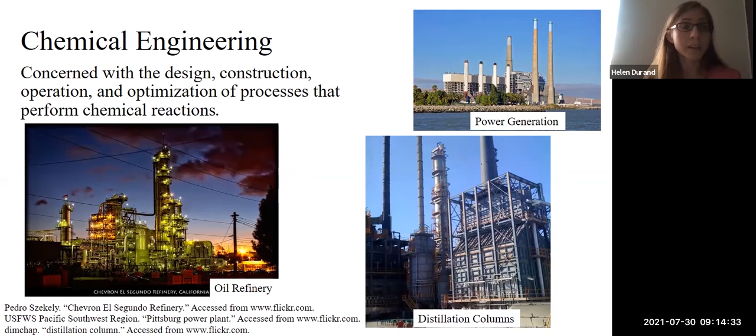So I'm a really big proponent of chemical engineering. I think it gives people a very broad range of skills that allow them to go into all kinds of different disciplines and very exciting career paths and really make a difference and a change in our world.

In our department, we have a lot of different research, and again, sort of showcases how broad chemical engineering is as a discipline. We have research in our own department in areas as diverse as battery technology, biomaterials and tissue engineering, catalysis, drug and gene delivery, molecular modeling, polymer and colloidal engineering, process optimization and control, and sustainable systems engineering.

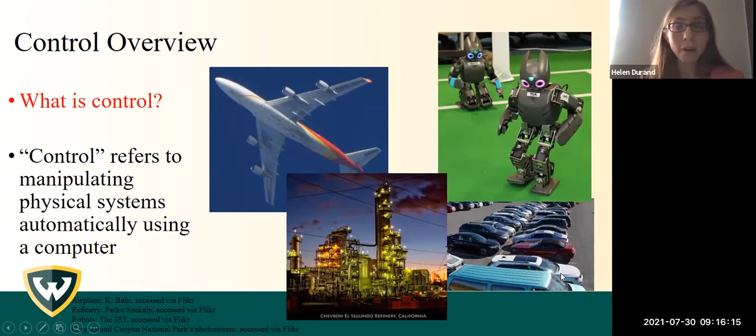So one thing people might wonder if they're not in the control field is, what is control? Control refers to manipulating physical systems automatically, essentially using a computer. You might say, what kinds of physical systems would we like to do that with? Well, basically everything: airplanes, chemical plants, robots, cars. In general, control is a very important part of modern day engineering.

So the question would be, how do you do that? How do you actually manipulate a physical system using a computer? Well, the computer needs a little help from some other things. There need to be sensors, and then the controller, which is the computer, also actuators. And then we're controlling what we call a process, which is our physical system. I'll go into a little more depth on all of these.

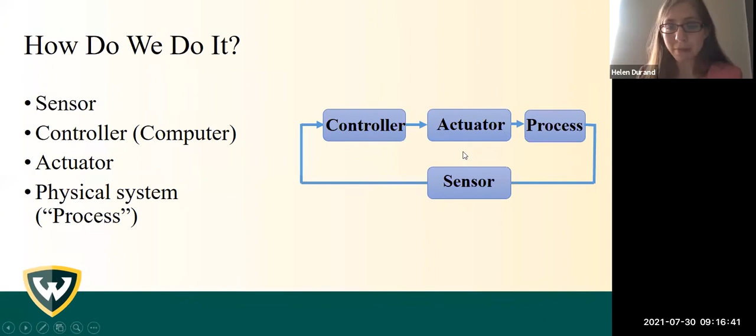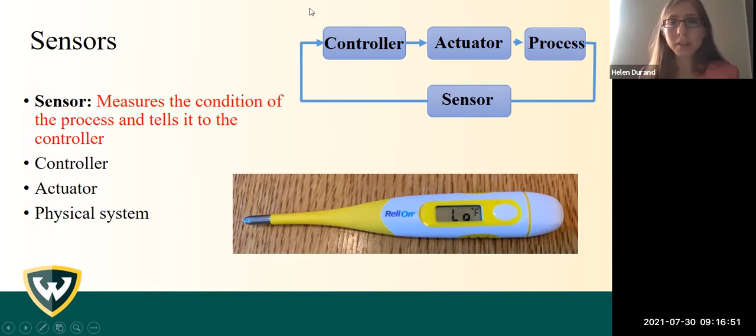A sensor, you could think of that almost like your thermometer. It's something that's going to measure the condition of the process, and then it tells that condition to the controller, letting the controller know what's the state of our physical system right now.

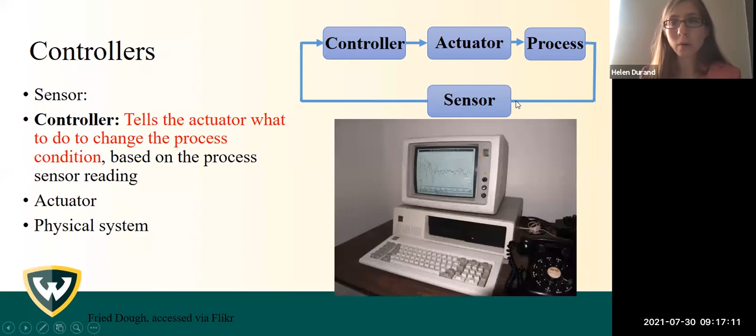The controller then is like a computer. Based on what the sensor tells it is the way the process is currently acting, the controller benchmarks and says, okay, is that what I want it to do? Do I want it to do something else? Then it tells the actuator how to manipulate the process in response to the current process state. The actuator then will change in a way that impacts the process.

We can think about this control loop in a nice way by thinking about a faucet and a sink. Let's say we have a sink with some level of water in it. With our eyes, which are our sensor, we'll look and say, what do I think about the level of water in that sink? Am I happy with it? Do I wish it was less? Do I wish it was more? Then our mind will act as the controller in that case to make the decision.

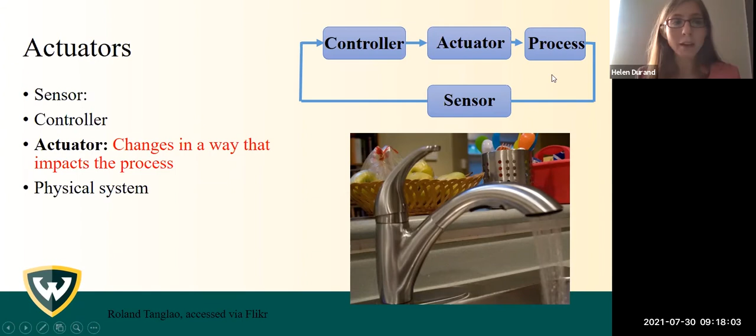We might say, oh, I wish the level in the sink is higher. If we choose that, then we use our arm and we go and manipulate the faucet. We'll say, okay, if I want more water in my sink, I'm going to turn on the faucet, and if I want less water, I'll turn off the faucet. That will impact the level of water in my sink. In general, we don't just have sinks that we're controlling - we can have processes across many disciplines. That's the basics of how control loops work.

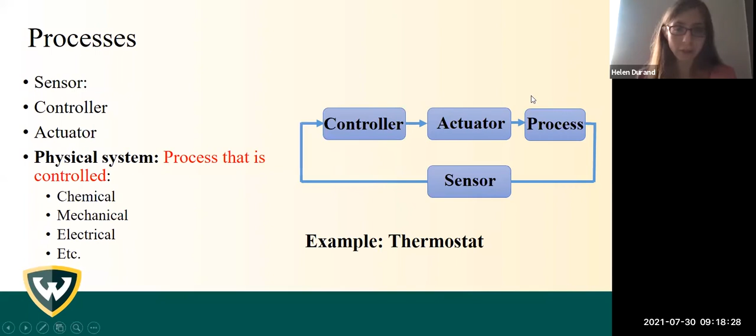Another common example people might think about is a thermostat in your house, where it measures temperature, and then based on temperature, it takes some action and says, am I happy with the current temperature? Do nothing. If I'm not happy, I either heat or cool, and that will impact the temperature in the room. So there's controllers in basically everything you do all day.

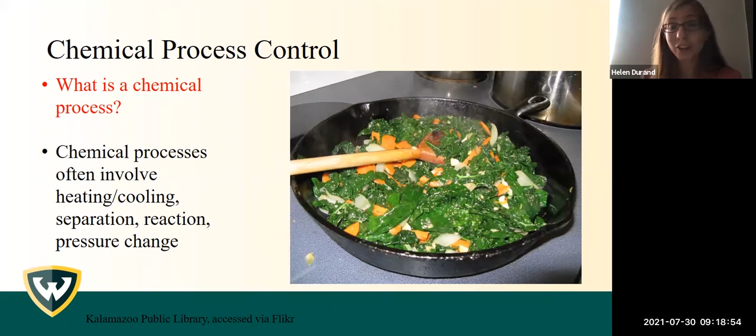So now that we have some basics of control, what is chemical process control? That requires us to know what's a chemical process. In general, chemical processes involve heating, cooling, separation, reaction, pressure change. You could think of that almost like cooking - when you're cooking, you throw lots of ingredients together and apply heat and things like that to try to facilitate changes in the materials you're trying to cook. Similarly, in chemical engineering, we want to make changes in some original raw material to transform it into something that we would like to sell.

But oftentimes in chemical engineering, we have really gigantic processes. This is an example over here on the left of a really big refining operation.

So why do we want to do control of chemical processes automatically? Well, imagine operating this refinery like you do your stove. When you're cooking, you kind of benchmark with your eye and say, it looks hot enough, and you adjust some knobs and hope you do a good job. But if we were just sort of hoping and having people stand by every valve at our process and adjust them by hand all day, we would never operate things like this efficiently.

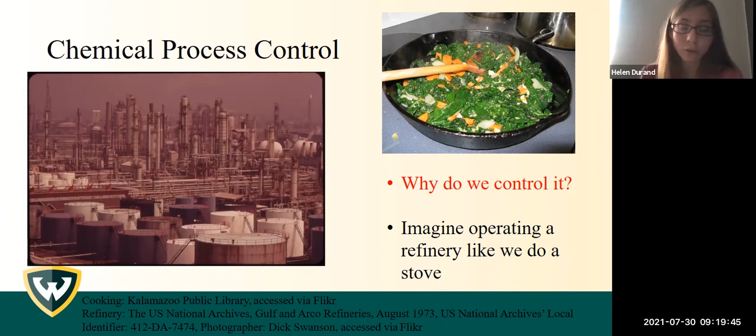It's very important that we have good control algorithms for our chemical processes to operate both safely and profitably. Chemical processes transform lower value chemicals or materials into higher value chemicals and materials.

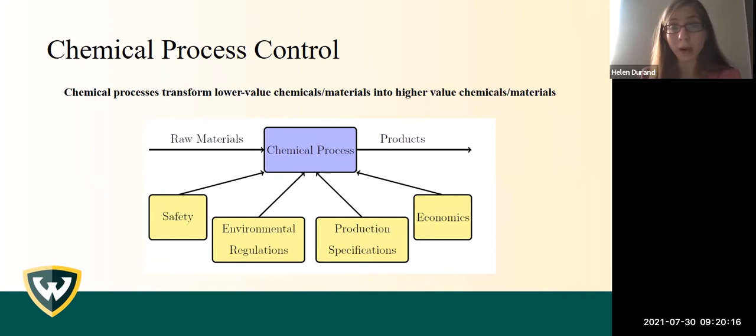We have a lot of operating objectives when we do this. We want to maintain safety. We need to meet our environmental regulations, keeping our process under control so that we don't pollute too much. We need to meet product specifications - we can't just sell any chemical that happens to come out of our process. Customers will only buy it if it meets certain requirements, like maybe a certain purity. And finally, we do need to make a profit.

People are probably getting used to by now this idea that these feedback control loops are very helpful in achieving all of those goals.

I did want to give a few more control engineering type terms here. So we have our process, which we've defined as our physical system. But what we measure from that process is what we call in control engineering our output. For chemical engineering, that could be something like temperature, pressure, or concentration.

We also have this thing called a set point, and the set point is the value we would like our output to take. The error between the set point and the output is what the controller gets. Based on that error, the controller can tell how far off my process right now is from what I want it to be doing.

Based on that value of the error, the controller then computes something to tell the actuator about what input it should apply. Input is the word for what the actuator does to change something, like the output from the valve. So the output from the valve then could be the input to the process.

In addition to these inputs, which can change the process condition, disturbances can also change the process condition. Disturbances are things that we don't have the direct ability to manipulate, but they're still changing with time, and they're still impacting the way that our process or system is evolving.

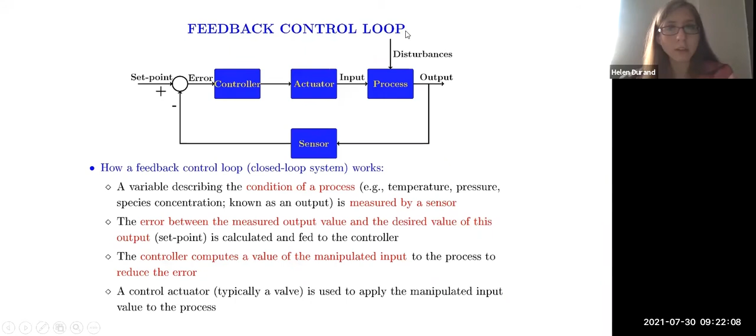You could think of a disturbance something like this. Imagine that you're storing your feedstock for a chemical reactor outside, and today is a hotter day than yesterday. So maybe the temperature in your tank is a little hotter today than it was yesterday. So your actual feed to your process is a slightly different temperature today than it was yesterday. But you still need to get your reactor to give the same temperature that it did yesterday.

So you have to counter this disturbance of the temperature of your feedstock. In what I just said, there was a lot of discussion of the word change - that things are changing, controllers have to help with changes, they facilitate changes, disturbances make changes. Because of all of this concept of change, which is what we call dynamics, we have to understand dynamics before we can control something.

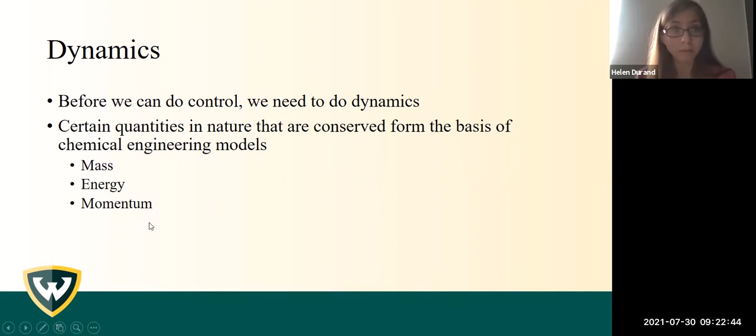In chemical engineering, many quantities in nature are conserved, and these form the basis of the dynamic models that we make as chemical engineers. Things that are conserved are things like mass, energy, and momentum. Let me showcase this with a really simple example.

Here, I demonstrate what it would look like to do a mass balance for a tank. So you want to say the mass in that tank is going to be conserved, meaning that the accumulation of mass in that tank equals the amount of mass coming in minus the amount of mass going out, plus the generation of mass in my tank.

Overall, I can write the mass in the tank as equal to the volume of the tank times the density of the fluid in the tank. And the volume can be, if we have a cylindrical tank, the cross-sectional area A times the height or the level of the fluid in the tank.

We can then look at the accumulation as the change in the mass over time. We can say the mass into this tank is the volumetric flow rate coming in times the density of the fluid. The mass out of the tank is the volumetric flow rate of the fluid going out times the density of the fluid. And the generation of mass in the tank is none - we're not having any reactions here to change like a species mass or anything like that. We're just going to assume no reaction.

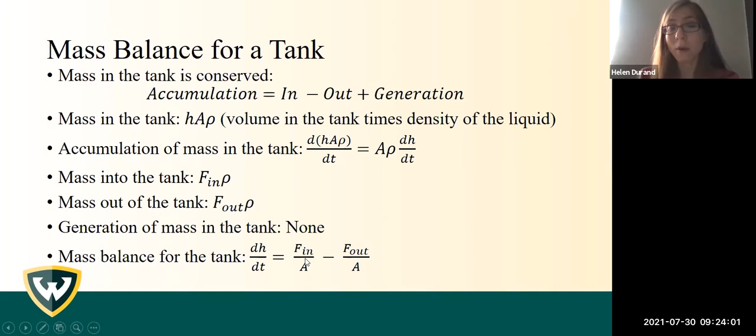We're looking at one species all the time and no change in mass. Then here in the end, we get this mass balance for our tank. As you can see, this is a differential equation, so this expresses the dynamics of our tank. It shows how the level is going to change in time when things like the flow rate into my tank and the volumetric flow rate out of my tank become different.

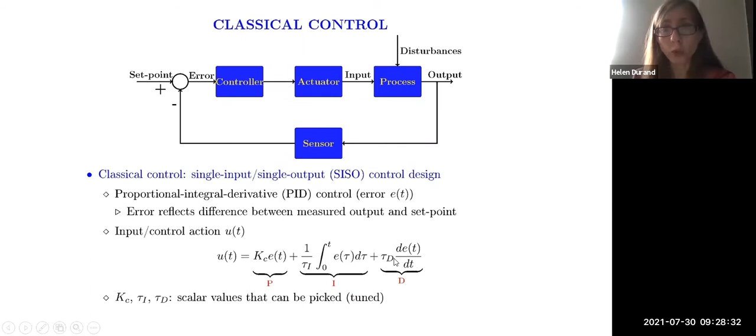That error, as we stated before, is the difference between the set point for our output and the measured value of our output. This is called PID, or proportional integral derivative control, because this is the control law. It has a term with a proportionality constant times the error, a term that's the integral of the error, and a term that is the derivative of the error. These scalar values, Kc, tau I, and tau d, can be picked or tuned by a control engineer to try to achieve a good process response.

To handle the integral of the error, we'll use numerical integration. I add this dynamic state to my control law, representing the integral of the error. If I take its derivative, I get back the integrand, which is just the error. Using this set of two equations, I can simulate my PI controller.

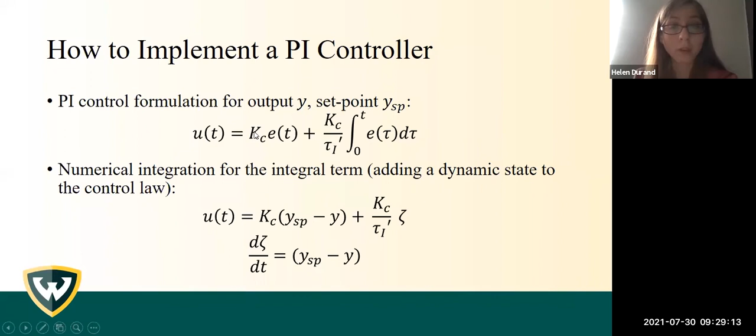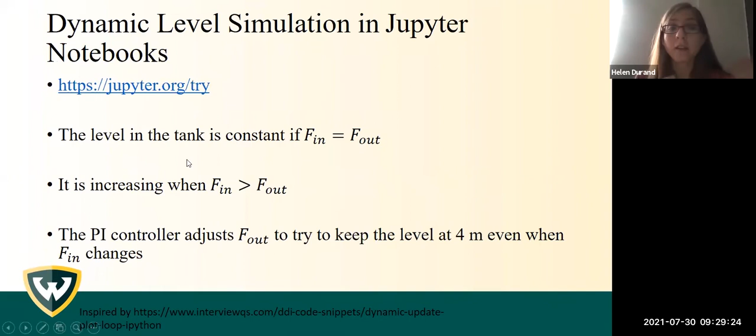Now we're going to see what that same level simulation we looked at earlier looks like if I add a PI controller to it. Before, the level in the tank would remain constant if the flow rate in equaled the flow rate out. If we take no action when flow in is greater than flow out, the level increases. But now we'll use our controller to counter that, adjusting the flow rate out to try to keep the level at the 4 meter mark, even when the flow rate in changes.

For those interested in looking at the code, this will be the second example. I'm going to put this one now in the Jupyter notebook, and we'll also watch a dynamic simulation here.

I'm going to press run, and now we're looking at the level once more. Here we can see the level is gradually increasing as it did before when we had no control. But here we see a slightly different effect. In the past it just kept increasing, increasing, increasing, almost linearly. But here we see it's leveling off—the level in the tank is starting to reach a new constant value because of the action of the controller, which stopped it from continuously increasing. We can see that flattening off right here.

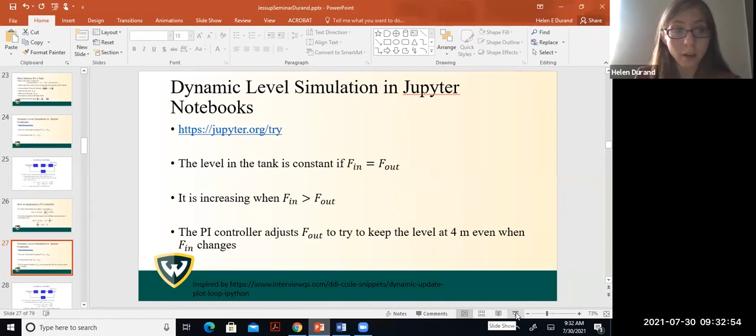So with that, we can start saying, are we good? It looks like I can just adjust these parameters, KC, tau I, tau D, and be kind of happy. I can get different responses. Am I done? Is there any more to do in control?

We can start saying, does this do everything I really want? And the answer is, it can be a little challenging to make it do everything you want. There's KC, tau I, and tau D here, these tuning parameters. As you could see just now, I was able to run the process earlier and find some values that did different behavior.

But if you really want to choose optimal ones, you have to have a lot of experience, or maybe a simulation to help you figure out which ones give you the best response. So it's not necessarily super straightforward to just say, what are the optimal values of KC, tau I, and tau D?

Also, this type of control law does not account for some of the complexities in process behavior. This is the control law you have when it's PID. The only flexibility you have is to change KC, tau I, and tau D, and maybe knock off some of these terms, say P only or PI only.

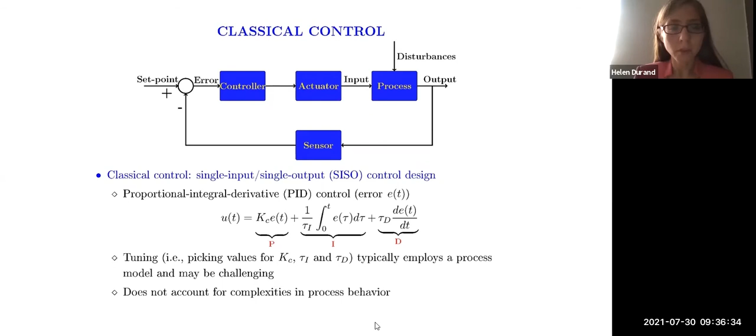Because of those drawbacks of the proportional integral derivative control law, we want to think about what we can do to do a better job. In the idea of more advanced process control, we start saying, what if I don't want to be restricted just to the PID control type framework? I want to instead use a dynamic process model to help me choose the dynamics I ultimately want from my closed loop system, and then try to force myself to get them.

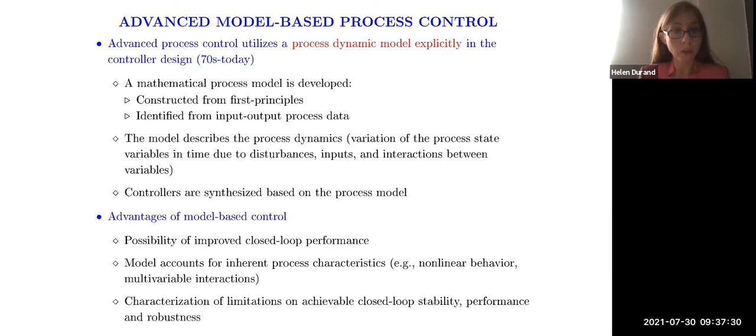So when I know my dynamic model, either from first principles or from identifying it from process data, what I'm able to do is start saying, okay, this is how my process does behave, here's my target behavior, what control action is the bridge between those two things to try to get me exactly what I want? You could see that by looking at this example.

So what does it mean to use a process model in a control design? Here we have that the derivative of the state is equal to x squared plus u. This is super simple, it doesn't represent necessarily anything physical. But here we have u is equal to negative x squared minus x. Let's say I choose that.

Well, in that case, I cancel out this x squared here, and I'm left with minus x. So the closed loop dynamics, meaning the dynamics under the controller, are now x dot equals negative x. So in this case, you can see what I did: I said, here are my dynamics, what I want them to be is this, what u is the bridge between going from here to here? And we see that this u gets me here.

And so that gives me a lot more flexibility to specify responses than I could get with just the traditional PID type control law.

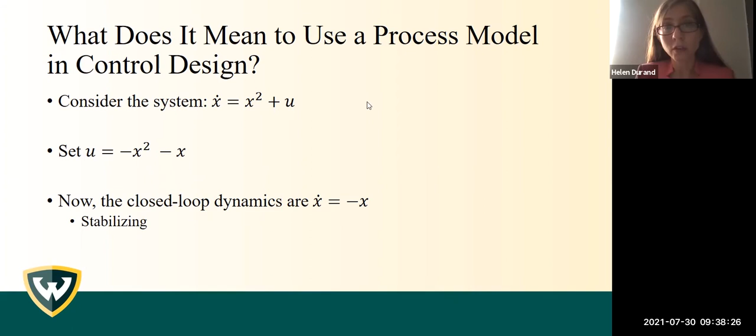You might say, well, why are we looking at these nonlinear processes now? Well, because in chemical engineering, a lot of times we do have nonlinear processes. You can see this by even just considering one of the most simple chemical engineering processes, which is a continuous stirred tank reactor, or a CSTR.

In this case, we have just a continuously stirred tank. We have a concentration of the feedstock, concentration of our reactant A coming in at a temperature T naught. We have a flow rate out of this at a concentration Ca and temperature T. And then we have this heater with heat rate Q. So this is all we have. It's that simple: one reactor, one stream in, one stream out, and a heater.

But in this case, already we have a nonlinear model. You can see what we get from our mass and energy balances. Where the nonlinearities come in is through these exponentials of the temperature and the constant multiplied by the concentration, which are our states, because they're the things that are changing with time. You might say, well, why are those there? That's because of our reaction rate laws.

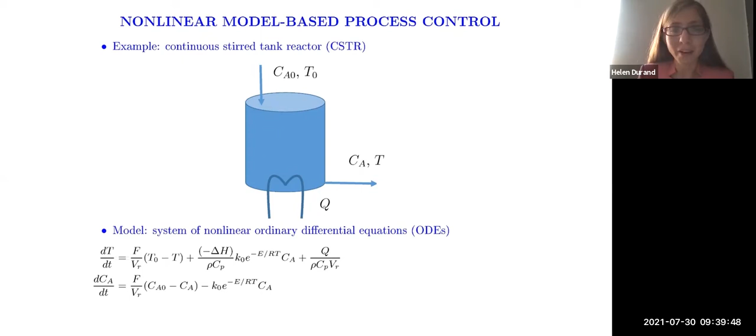So given that in chemical engineering we're often doing reactions, if reactions are causing nonlinearities, in general in chemical engineering we're going to get nonlinear ordinary differential equations. Because of that, I want to make some notation that I'll use to say, okay, this is a system of nonlinear ordinary differential equations. So let me define that notation.

X here means the vector of the process state, which here will be our temperature and our concentration, because that's what's changing over time. And x dot, or dx/dt, is the time derivative of the state. U is equal to our vector of our inputs. So here, let's say that my input is my heat rate, that I'm going to manipulate with my controller. Now U is going to be the heat rate, and W is my disturbance.

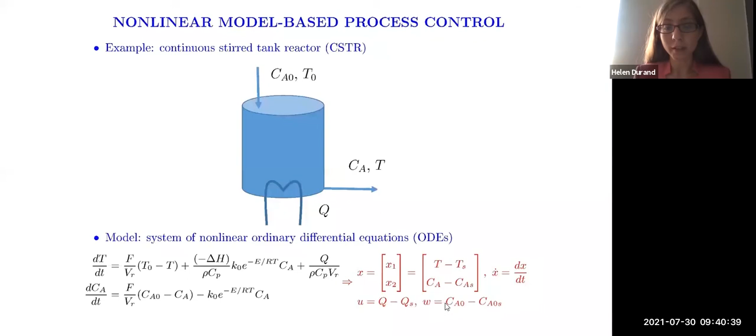So here I might say, okay, pretend that I have a time varying concentration of my reactant. Maybe I have some type of feedstock that's not 100% consistent in the exact composition. And so then that's my disturbance. This is the notation then that we'll use to say we have a system of nonlinear ordinary differential equations. This says that the time derivative of our states is equal to some nonlinear function of our states, our inputs, and our disturbances.

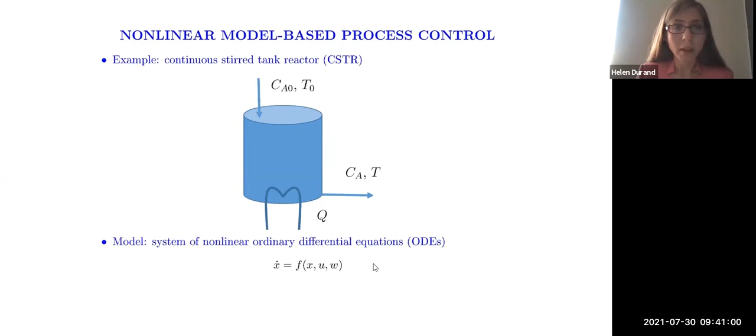And so what we're really interested in is doing control design for systems of this type. I was mentioning that there are some ways that maybe we can cancel out nonlinearities. For example, like what we did in the case where we had u equals negative x squared minus x, to in the end get something like x dot equals negative x. That's one way of trying to design controllers.

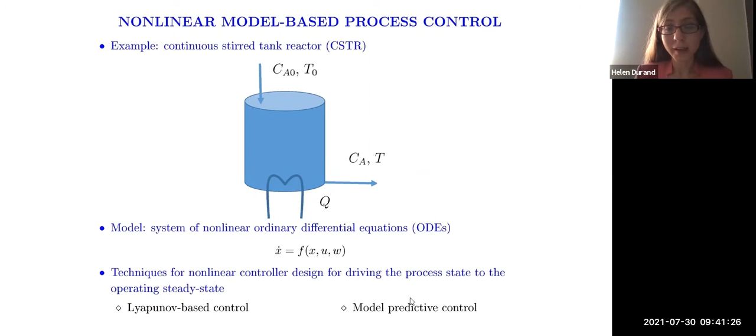And then the thing that is really exciting to talk about is model predictive control. So that's coming up here. But before we can really understand a lot of things about control for nonlinear systems, we have to understand a really important concept for those called stability.

So stability is whether or not, if you start close to an equilibrium point of your system, meaning a point where if you start there you stay there, then if you start close to this point, do you eventually stay near that point and or go even closer to that point and eventually reach it? Or do you move away?

And so you can think about that with a pendulum. Say that you have a pendulum and you're able to 100% perfectly balance it so that it's straight up. This is an unstable equilibrium for that system because as soon as you tip it in either direction, even the smallest amount, it's going to stop being straight up, not go back to being straight up, and instead go to being straight down.

If we start in the straight down position, we can say that that's a stable equilibrium, because if we perturb ourselves slightly and kick it a little bit off the straight down position, it eventually goes back to that. So even in our intuition, we can understand this concept of an equilibrium being stable or unstable.

For a pendulum with friction, we can write differential equations that describe the angle between the pendulum and the vertical axis, theta, and its time derivative, and how they're changing over time. This will then have different equilibria, saying okay, it's not changing over time anymore at positions where it can stay there.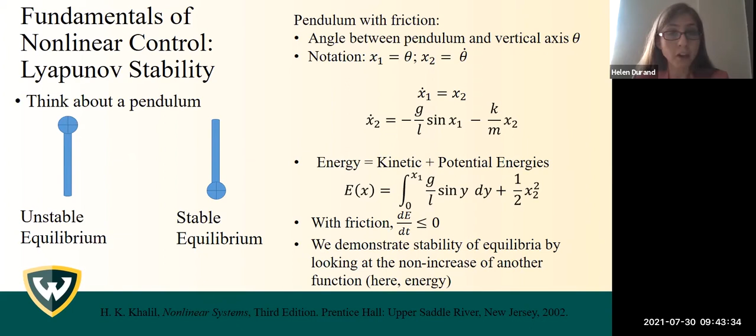So in this case, it's really interesting to think about that concept: we were thinking about stability of our equilibrium by looking at the non-increase of another function, which was energy. And so that is sort of the way that you can start thinking toward the concept that we use in control of Lyapunov stability. In Lyapunov stability, we do something very similar to what was just described.

We have to define a function. That function is positive, except at our origin or our equilibrium point, where that function should evaluate to zero. This is called a Lyapunov function, which we often denote by V.

Say that this is one of our system trajectories. Say we start our system here, and this is the way that it evolves. It goes along this blue line, and that reflects how x1 and x2 are changing over time. Each point on this plot is a different combination of x1 and x2 at different time points.

If this is the way our system is evolving, and if we were to compute the Lyapunov function along this trajectory and it was always decreasing, then even if we didn't know how this trajectory looks and we didn't plot it, we would know that we must be approaching the origin. The way you can tell is that V is positive when we're not at the origin, and it's also increasing.

If we cause it to decrease, decrease, decrease, decrease, then that means we must be heading toward the origin, because the origin is the only place where this function is zero. That function is increasing as it goes away from zero. So therefore, if we eventually keep decreasing it, we must eventually cause it to equal zero, meaning we must eventually hit the origin. So we can use these Lyapunov functions, these alternative functions, to represent to us whether or not a system is stable.

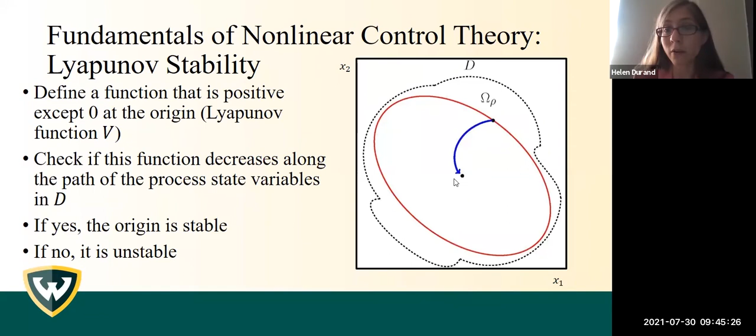Or a system's equilibrium is stable or unstable, meaning when we start our system close by, it eventually evolves to reach the equilibrium, or it doesn't. If it goes away, then that would be the case that it is not stable. But we use Lyapunov stability theory to help us understand whether or not an equilibrium point is stable.

This is what we call here a Lyapunov level set: the set of all points where the value of the Lyapunov function is equal to a certain value. So here, this set of red points is where the Lyapunov function evaluates to a given value, rho.

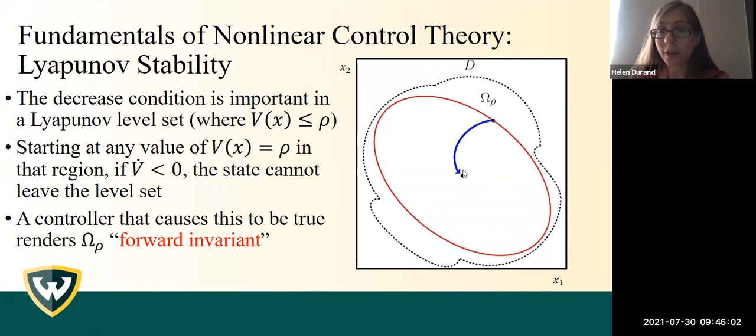This set would be what we call forward invariant, the set of all the points inside of this, because we're not able to leave this set. So it's invariant—once you're in it, you're in it. We can only move toward the origin in this set, but we can't move away. And so that's the concept of stability.

We can also see the way that the Lyapunov function is decreasing in another simple example. Here's what we're going to look at: x dot equals x squared plus u, and u is equal to negative x squared minus x, same one as earlier. So the closed loop system dynamics are x dot equals negative x. Here we can talk about what if we chose a Lyapunov function—again, it's positive and increasing away from 0, but it's 0 at 0. Something like this, V equals x squared.

If we take its time derivative, with the chain rule, that's 2x times x dot, which is 2x times x squared plus u. And then we can plug in our value of u here, which was negative x squared minus x. Eventually we find that v dot is negative 2x squared. That's less than 0 no matter what value of x we choose, because if x is negative, x squared is still a positive number, and if x is positive, it's a positive number.

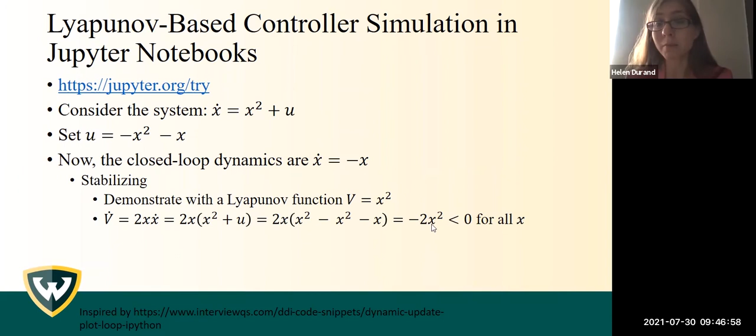So a negative times a positive number is always going to be negative. And so we can actually watch in our final Jupyter notebook, the other ones are in the Google Colab, we can watch the value of our Lyapunov function decreasing over time for this example system.

So here we go. Here is our value of our Lyapunov function v, and we can see that for the system, it's only decreasing with time. And that's because we are controlling the process with that controller that causes v to decrease.

And here we can see how the input u is changing over time. And here we can also see the value of x, that it's decreasing over time. So it's approaching the origin over time. I mean, not in any fast way here, at least not over 0.1 seconds, it's not there yet, but we can see it having a decrease.

So that's basically our intro to control so far. Next is our starting to move into model predictive control. Are there any other questions before I start moving into model predictive control? No? Okay, well, feel free to ask at any point.

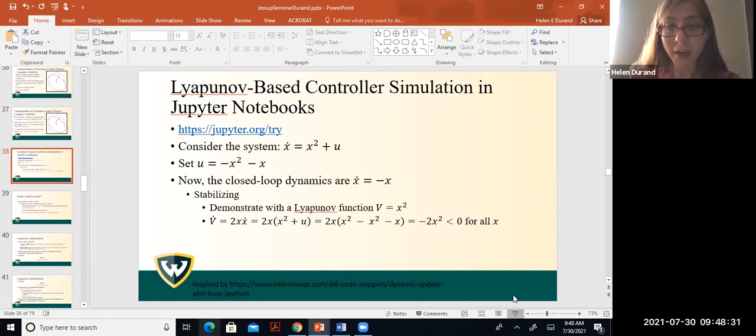So then we can say, okay, great, I feel like I did better than before. So already my PID controller started off like it was, I was able to control a system. I could change my tuning parameters. I saw what that looked like, that I could achieve different types of behavior by changing my tuning parameters.

Then we said, well, what if I want to really spec out my behavior? And I want to not just have this one PID control law and just try to tune within it. What if I want to spec out the behavior a little more? And then we said, well, great, if you understand stability of nonlinear systems and you understand how they operate and their dynamics, then now you can start specking out things in new ways and being able to get controllers that cause certain behavior to happen, that are stabilizing and drive you toward certain equilibria, etc.

So what could be better than that? So then that's where we get optimization-based control. We want to find not just a stabilizing control action in this case, one that will cause our Lyapunov function to decrease over time so that we can eventually know that our controller is causing us to approach an equilibrium that we might want to operate at, but also we should be finding a controller that is the best with respect to some metric that's also stabilizing. So it's not obvious how to just find the best controller. Do I just think of that off the top of my head and I hope I code it? Well, instead we use optimization, and we have to solve an optimization problem to help us find the answer to this.

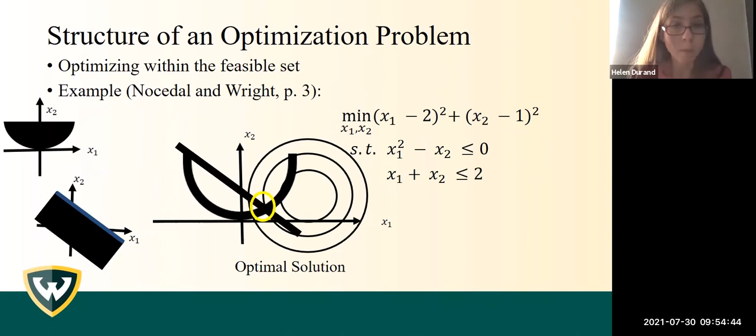In optimization, the basic way algorithms work is you start with some guess of the decision variables, and then they make better and better guesses over time until you find a solution to the optimization problem. Algorithms differ in how the guesses are updated.

So here we're going to look at a small example optimization problem. This time we're going to switch from Jupyter Notebooks to Google Colab.

So let's look at our Google Colab. The Google Colab file has several parts. It needs to get some different software here, since we're trying to get an optimization solver to run in Google Colab.

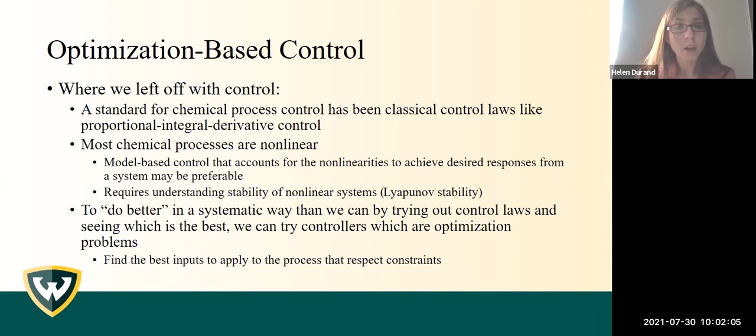The way we can do that is by making a controller that is actually itself an optimization problem. So the controller will solve for the best inputs to apply to the process that respect constraints. This is the mathematical representation of where we're at right now.

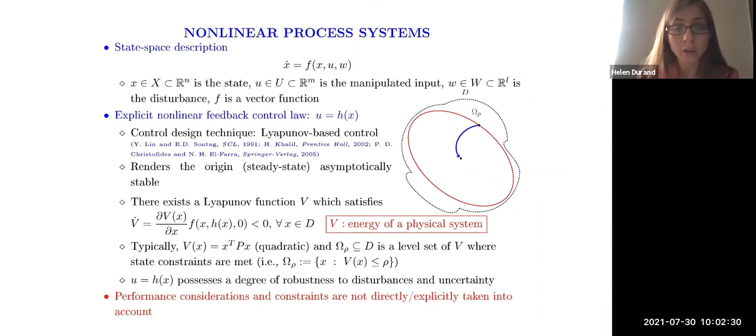We have our nonlinear process model. We said, okay, even if we have a control law here denoted h of x that can cause v dot to be negative, that's not necessarily enough because we didn't yet account for performance considerations and constraints explicitly in our control design to allow us to do better than what we talked about before.

So this is where model predictive control comes in. Right now I have several slides that are just back to back. Here's the basics of MPC. MPC has a lot of layers to it of things to understand. So I'm going to go through the high level overview of all the components of MPC, but then we'll break it down a little more through the context of a process example or a small simulation example, and I think that will help a lot of these things to come together a little better.

So MPC, as is written here, is actually an optimization problem. Since we've learned about optimization, this probably looks pretty familiar to everyone. We're going to minimize some objective function. Our decision variables here are the inputs, so we're solving for the inputs that are optimal, and then we have our constraints here. For MPC, a lot of times in industry, the way that it's implemented is with a quadratic tracking stage cost. This might be something like x squared plus u squared, for example, if you have a single state and a single input.

The optimization of MPC is solved every delta time units, where delta is what we call a sampling period. So we say it's solved at every TK. T0 is the first one, T1 is the second one, et cetera. The solution of the MPC is a piecewise constant input trajectory with n pieces, where n is what we call a prediction horizon, and each piece is held constant for a period delta.

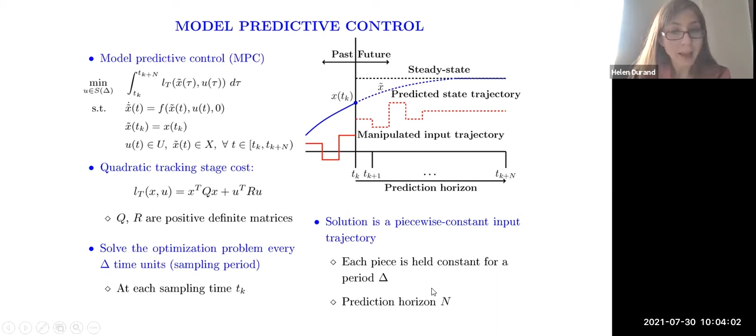The idea here is demonstrated via this red trajectory. Between TK and TK plus 1, my input is held at a constant value, so it's piecewise constant. At TK plus 1, I'm allowed to change it again. I keep making it change every delta time units, which is the length of a sampling period, until I get to the end of the prediction horizon.

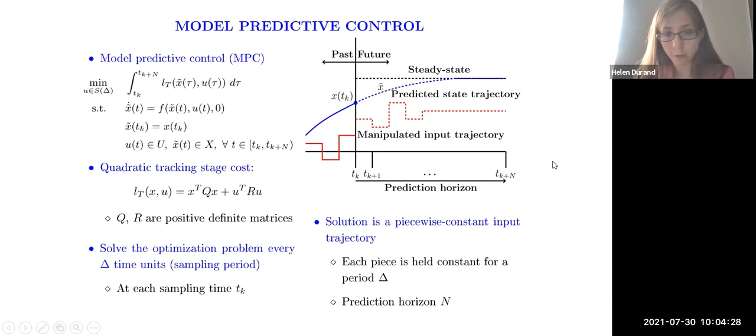When we solve this MPC optimization problem, it's just like we wanted to do before. We want to find the values of u that make our objective function as small as possible. But we do have a little bit of a different thing than before: here we actually have a dynamic model listed as one of our constraints. We'll see how to play that out in a few minutes, but the idea is that the predictions of x into the future that occur in both our objective function and our constraints have to come from this dynamic model. We have an initial condition set equal to our state measurement, and we have these state and input constraints.

Because in chemical engineering we often have these nonlinear models, typically you would have to use some type of nonlinear programming, which is optimization for a nonlinear problem, to deal with this. An important issue we're also going to see in a minute is this question of feasibility: does there exist any u that can cause all of these constraints to be satisfied at once? You actually have to design your controllers carefully, because if you don't, you'll end up with situations where there is no control action that can satisfy your constraints. That would be a problem, especially if your constraints were based on safety.

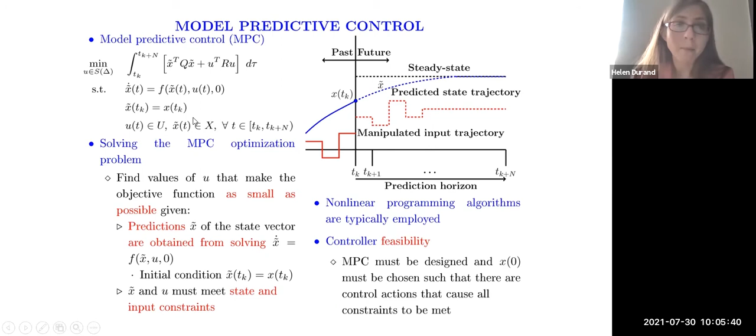We implement MPC in what's called a receding horizon fashion. This means that even though we're going to calculate an input trajectory that goes across the entire prediction horizon, we're only going to apply this first piece from TK to TK plus 1. And so you'd say, that seems crazy—why am I solving for things that I'm not going to ever implement on the system?

Well, the reason is that a real system doesn't actually behave according to your process model. It's a little bit off. You have what we call plant model mismatch, where your actual system, which we call the plant, and the model of your system are not exactly the same, because we just don't fully understand every detail of physics, or we can't measure every single thing that's actually happening all the time to be able to make our models perfect. So if we just apply the control actions that we calculated at one time for a long time, because of this mismatch, those might not actually be the best control actions to apply to the system.

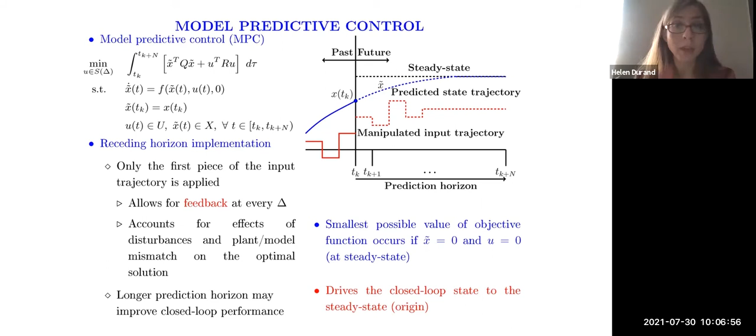Instead, what we do is we predict what should be the best control actions, but then we only apply one of them. At the next time we measure again and say, okay, where's the process at now? Then we update the control actions that we're going to apply, so that we're always trying to apply the best one that we can given our current measurements.

So we're going to look at a small example to demonstrate a lot of these concepts. In this case, I'm going to choose this nonlinear system, 2x squared plus x plus u. Here's, again, the random metric I chose that we want to minimize over time—say this somehow represents the performance of this system. And we have these constraints: our inputs u have to be between -1 and 1, and we also have what we call a state constraint, which requires that our state has to be here between -3 and 3. So the input can't do whatever it wants; it can't move the system out of this range.

Now, I did not look at feasibility issues with this when I designed this. I just said, okay, let's just say this is what I want. And that doesn't mean that if I just throw this up on the slides that this is necessarily possible to do.

That's the question I mentioned earlier: as control designers, we can't just throw any optimization problem at the process and say, okay, the process had better meet that. Processes have dynamics, and depending on the system, they may or may not be able to do the things we tell them to do. So you have to be really careful when designing a controller as an optimization problem, so you're not telling it to do things that are impossible.

We want to answer the question: what's the best trajectory for our inputs if we start the system at x of 0 is 2?

Now we're going to start breaking down those things I talked about, receding horizon and other things. One complication you might think of is that we need to implement inputs on our system continuously, because if our valve is open, something's coming out of it, or nothing's coming out. We can't have a neutral position — physically, either something is coming out or nothing is.

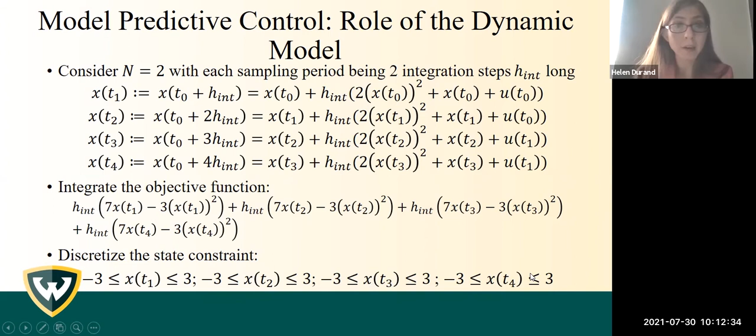So with that, I now end up with a set of decision variables that are these 6, and I have all of these constraints from what I just wrote. And so now I can write my original MPC as this optimization problem that we can actually start thinking about coding now. So here, my objective function no longer just looks like this symbolic integral. I've actually translated it into something that I can put in a computer.

And then same thing with all of my constraints. I don't just have a process model there anymore. Instead, I've made it so that my process model is now incorporated in the constraints and the objective function, and I've got something I can solve.

And we still have this thing here, X of T0. So at the initial time, that's equal to 2. But at the subsequent times, it's the measurement of the state. So as we said in our control loops, we have a sensor. The sensor makes a measurement and communicates that measurement to the controller. And the controller then uses that to compute the inputs. So here, the measurement is this X of T0.

And so now we're going to look at that simple case in the Google Colab. And so I'm going to choose this integration step of 0.01. This is for demonstration only. In general, you have to do a good look at your dynamics and you have to see if you're using a small enough integration step and things like this.

I'm just doing this for demonstration of being able to show how you can take an MPC that's coded in a very clear way that we can write on paper with almost only a few constraints, and show how you could translate that into an optimization problem. But I'm not saying this is necessarily a good integration step. I have not checked that for this. This is just for demonstration.

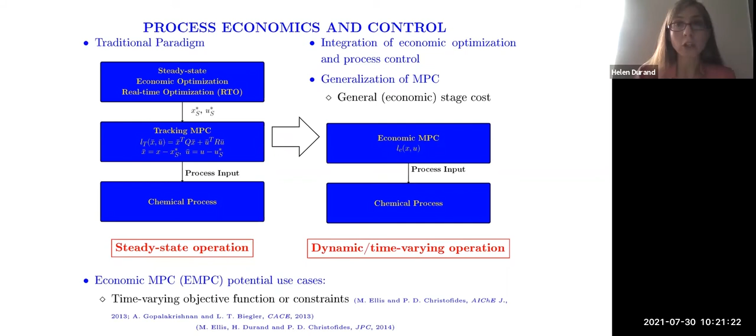Here you can see the idea of what it might look like if something was operated dynamically. The system is clearly operating in a stable fashion, in the sense that it's not going crazy. None of these states is going off to infinity. I'm not getting a runaway reaction or something very problematic, but they're not operated only at a steady state. They're kind of oscillating, and they're changing with time, but for some systems, something like this might be better than just tracking steady states.

That's the idea of economic MPC: you develop your optimization problem so that it has an economics-based objective function, you have some dynamic model, you measure your state, you have input and state magnitude constraints, and then you can also add other constraints. So there's a lot of flexibility in this controller.

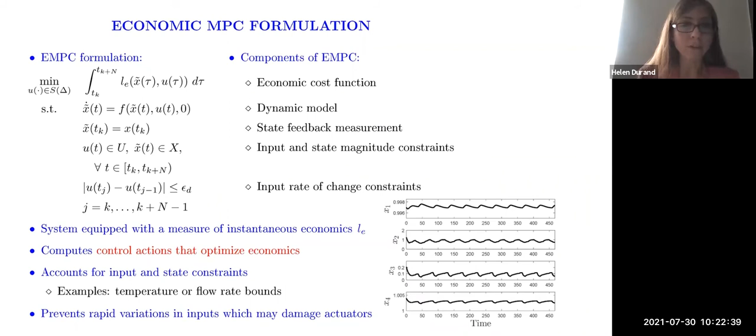Something that can happen if you're trying to optimize economics is that you might get really aggressive control actions. In order to prevent that, maybe you want to add constraints on your inputs for the practical reason that you don't want to wear out your valves. So there are ways you can actually adjust your optimization problem for practical purposes, saying okay, I don't like the behavior I'm seeing from my controller, how can I add new constraints or reformulate it to force the behavior to be more like what I would like to see for whatever reasons you might have?

Something also that's really important for control is looking at safety and cybersecurity. This is also an area that we've been looking at a lot in my group. Important safety considerations for autonomous systems include things like you want to prevent, if someone actually cyber attacks your control system, any harm to individuals. So you need to have ways of detecting someone attacking your control system and then mitigating the issues that can occur after that.

Also, there's lots of things you might want to incorporate like data-based models and model-based control without losing closed-loop stability. You want to make sure you're developing sufficiently accurate models, dealing with changes in dynamics over time, handling the possibility that there's falsified data being used in your model development. That's another cybersecurity issue.

You might think about how cybersecurity is related to chemical process design and how cybersecurity issues should inform our process design strategies. And then also control and cyber attacks, and how we might need to think about impacts of cyber attacks potentially on something like process equipment. I'll talk a little bit about some of the things we've been looking at for cyber attack resilience for chemical process control.

So if someone wants to cyber attack a control system, that means they could potentially get the direct ability to attack your actuators, your sensors, your controller code, things like this, that then directly impact a physical process, because the controller is right there at the interface between your cyber systems and your physical system. This could impact all kinds of things: safety, profit, production rates. So cyber attacks on feedback controllers are something that we wanted to better understand for chemical processes.

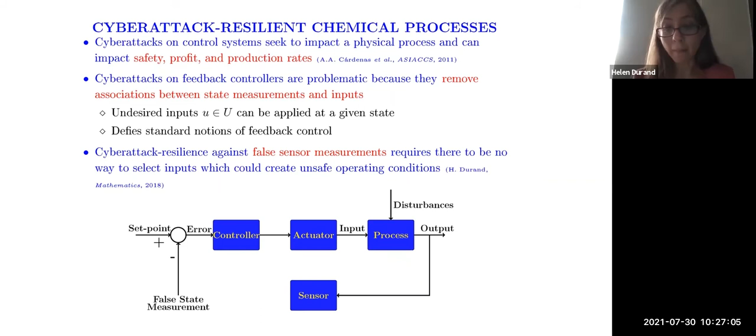As a result, cyber attack resilience against false sensor measurements would mean that there has to be no way you could select an input which could create an unsafe operating condition. So you might ask, how do we design detection strategies and controllers to help us achieve that goal of not being able to apply bad inputs to the process, even when there's an attack? That definition didn't give us a lot of help at knowing how to do this.

In our work, when we first started looking at cybersecurity a few years ago, we did some simulation studies to try to understand whether some initial concepts we had would be helpful or not. These actually gave us a lot better understanding of what it means for something to be cyber attack resilient, and what it doesn't mean. So I'm going to show two different ideas for cyber attack resilient controllers that we looked at at that time, and hopefully these will help everyone's intuition as well, just like they helped ours.

The first idea we're going to look at is a controller implementation where we try to incorporate randomness. I'll show that in just a second. The other thing is where we integrate feedback control and open loop control.

That will be explained subsequently. But the overall conclusion we got from this work was that it's really important that you meet a nonlinear systems definition of cyber attack resilience to actually get cyber attack resilience. Hoping that an attacker doesn't understand something you're doing is not really sufficient for being resilient. We also concluded that maybe we need to look at some directions, like how process design or techniques which combine control and detection give us more power than just hoping that the control law alone can give us cyber attack resilience.

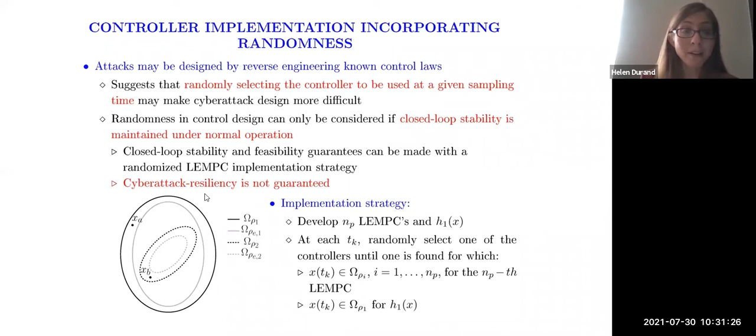So we'd randomly select controllers, and then based on whether or not they were in certain of these stabilizing regions, we'd either neglect them or keep them. If we couldn't find any that worked, we'd eventually just go to the backup controller. It turns out this strategy can actually guarantee that you always maintain your state within a known operating region over time when there's no cyber attack. So we were excited about that, but it turns out this actually doesn't guarantee cyber attack resilience.

So let's look at this with a chemical process example. This is a continuous stirred tank reactor with a second order exothermic irreversible reaction. Our control objective was to say, could we operate our process in an economically optimal time-varying fashion while maintaining closed loop stability, even when we get a cyber attack? Here is the objective function we use - this is the time integral of the production rate of our product, so it's somehow related to our economics. That's why this is an EMPC.

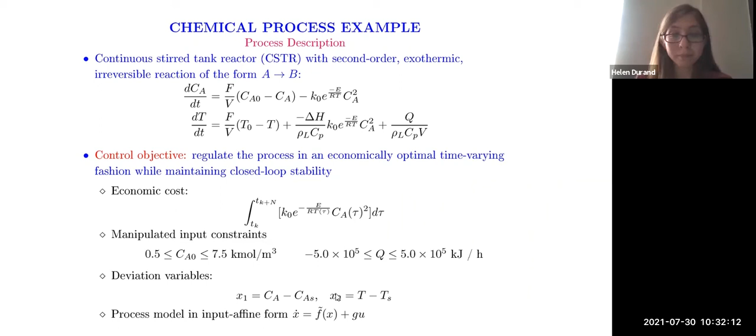Then we had these input constraints - these are our two inputs, our feed flow rate or feed concentration into our tank, and then our heat rate. And then we develop our constraints, which include some things related to Lyapunov functions, and those got developed here, and those are what give us some stability properties for our controller.

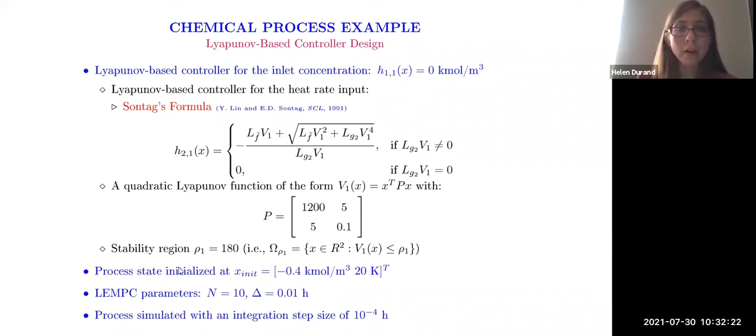So here we show this outer blue region is the operating region that we want to keep our state within. In here are lots of other regions related to the different seven control laws that were designed. When we operated this process under randomly choosing between all of these different controllers, the state was maintained in that outer blue region over time.

It looks a little crazy, like it's always changing CA and T over time. We would probably expect that if we're randomly selecting controllers, it might not do a really smooth trajectory. But this is without a cyber attack.

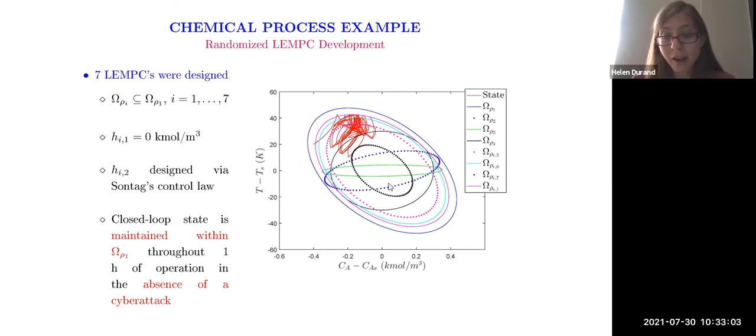So now let's say, okay, great, what if I'm randomly selecting controllers and I have a cyber attack? Here is a false sensor measurement that we applied in a case where we had a single economic model predictive controller, so no randomness, versus where we had this randomized implementation strategy choosing between different controllers at different times.

The randomized results did depend to some extent on the seed from our random number generator, but we saw that our randomized strategy didn't really do that much better than when we didn't have it. This figure shows the straight line as our threshold on our temperature—we never wanted our temperature to go above this value. Here we have what happens with the single LEMPC.

We see that the temperature goes above this value not long after the cyber attack starts—about 0.01 hours after the cyber attack starts, a little bit more than that.

And then we see here when we have the randomized strategy, we don't do that much better. It lasts a little bit longer before it goes over this temperature threshold, but it doesn't actually prevent the temperature from going over that threshold.

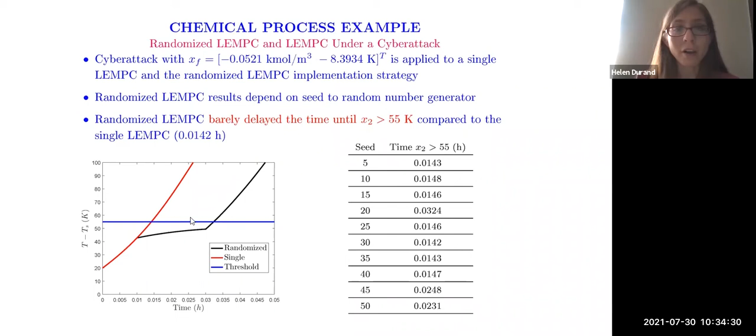On this figure, you can see that for different seeds to the random number generator, there were different times before it passed the threshold. But still, what this demonstrates is that fundamentally, randomization alone is not enough to prevent the cyber attacks from being successful at causing this process to reach an unsafe situation. So what this means is we didn't guarantee cyber attack resilience with that strategy.

So then we could say, okay, when could we get cyber attack resilience? Well, you could get it if you do something like this: say you have an open loop stable steady state. What that means is that if I just apply my steady state input corresponding to a certain steady state, it will drive my process toward that steady state from a lot of initial conditions around that steady state.

But this is not that helpful, because if I know what the input is that I want to apply, and I always apply the same one, I lose all of the benefits of feedback control. So great, maybe I can counter the cyber attacks, but if the cyber attacks only happen once in a great while, for the most part I'm really operating my process suboptimally. And so this is also not good.

So in light of this, we said, all right, well, this looks like there's some challenges with just relying on control laws alone to guarantee that we maintain safety even when there are attacks. So maybe in accordance with a lot of what had been done in the literature, where a lot of times people look at detection strategies, we said, let's try to integrate detection strategies with control and see if we're able to prove anything about the ways the detection strategies would need to be and the ways the controller would need to be—so that we would be able to either guarantee we detect an attack if it's a problem, or that we maintain safety if the attack isn't detected.

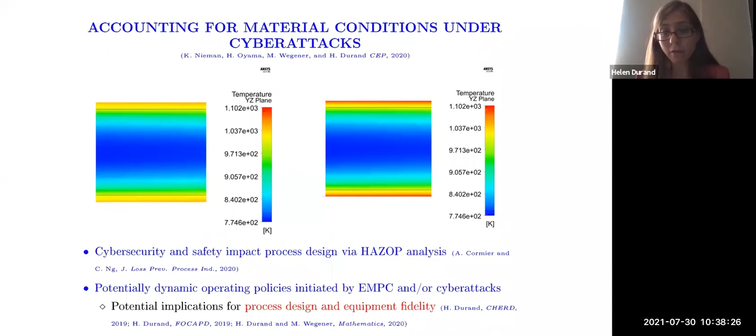And so with that, I'll make some final remarks here. The success of next generation manufacturing in many ways depends on the usability, safety, and security of advanced controllers. Optimization-based controllers are an example of a flexible automation framework that can optimize profits in real time. But there's a lot of things still open from both theoretical and practical perspectives to better understand how they can help us meet a lot of next generation manufacturing goals.

Some of the things my group has looked at in this area include how we can design control constraints to update in response to different things. For example, could you ever guarantee that certain constraints, even if updated in response to something as unreliable as a user preference, would still maintain stability? Or things like, what do you do to address cybersecurity via detection and control combinations? We've looked at how controllers can help us gather data we want to use for model identification, and what are the benefits or limitations of doing that. What are the interactions between economic model predictive control, control system cybersecurity, and process and equipment design?

And so these are some of the things we've been looking at, but the field of process control is really exciting. There's always so much to look at and to understand, and further advances are needed in control for better moving us toward intelligent, safe, secure, and profitable control systems that can really help with next generation manufacturing.